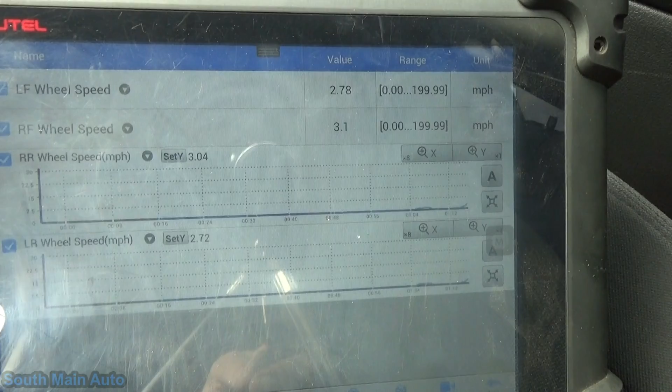We'll take it for a toot and see what it does. Alright, buckle your seatbelts, there we go. So left rear, that's going to be our bottom screen. I already see one little glitch there, just trying to pull out. Whoa, hang on, somebody's coming. We'll hang a Louie up here so we can go a little bit slower.

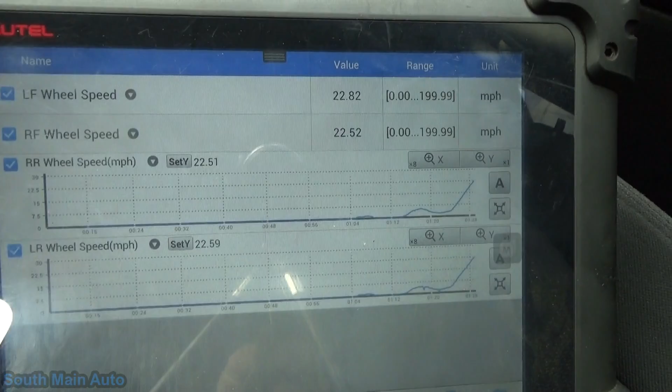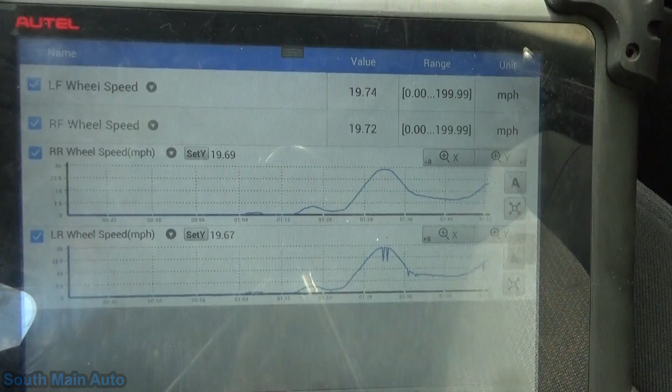Oh yeah, look at that. So even just looking at our scan data, hopefully you guys can see it, we've already got some glitches right there, and the other one I'm graphing is the right rear, so you can kind of compare it there. And I'm on a pretty smooth road.

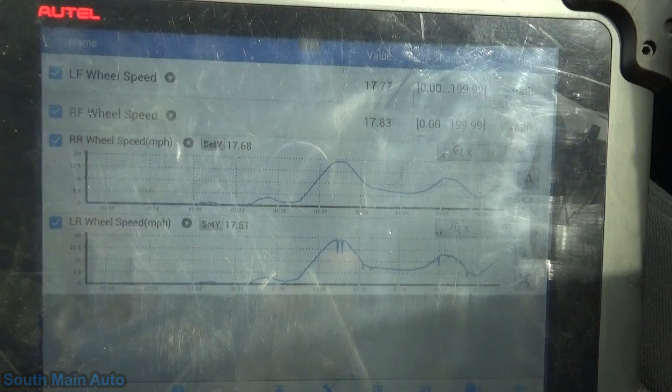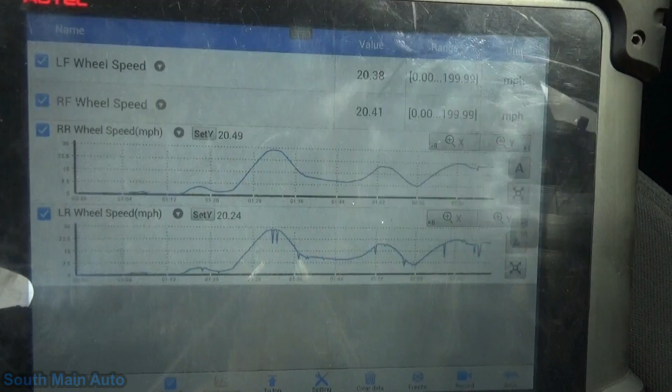So it doesn't seem to be indicative of bumps. We're gonna hit some railroad tracks up here, see if it goes AWOL on us. Hopefully you guys can see, I know we got some glare, but let's see what we got here. Some roughness, I can't see it quite... yeah, perhaps it has a little something to do with some roughness.

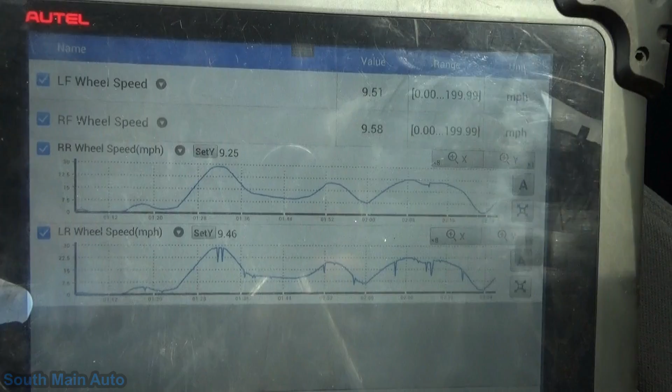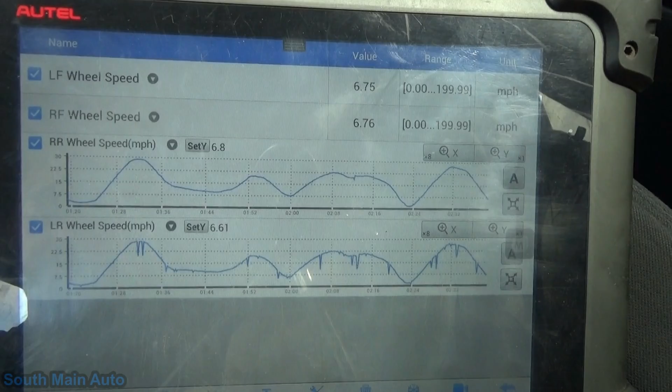I'll get up here to my rough road test drive area. We'll give it some wiggles and jiggles. But it seems even just accelerating there. So what we'll do, to get stopped, we'll just have a look-see at this one. There we go.

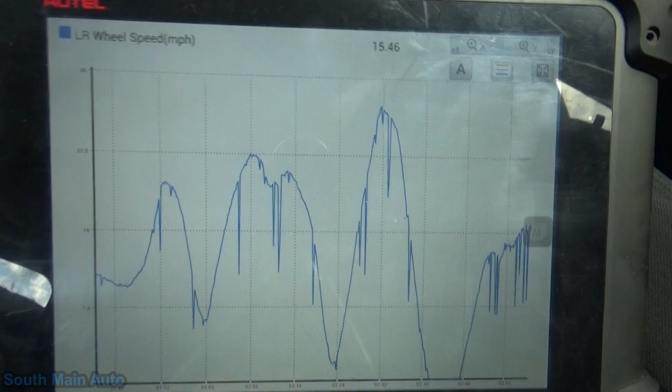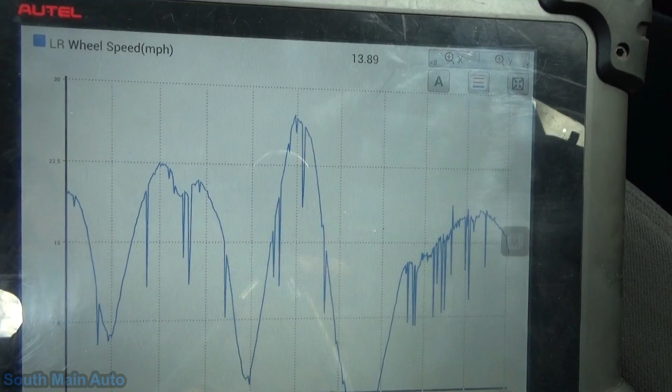Alright, let's go, hit a few little bumps here. That definitely makes a difference when you say, here comes some bumps. Bam! Get some real Jeep action.

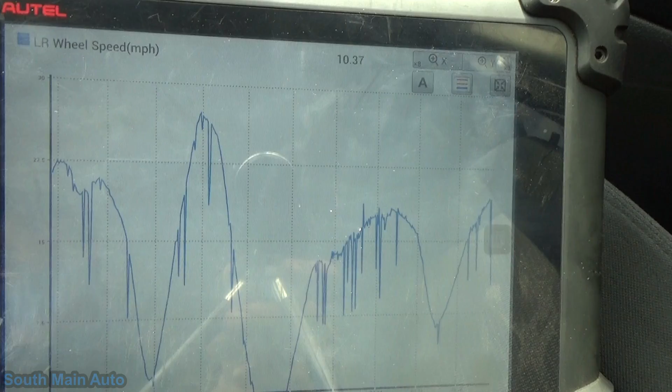Alright, so that does seem to make it worse, so that is a clue. Now we'll head out here on the pavement, relatively smooth road. Little bump right there. I would say the road surface definitely makes a difference, so that's something you can do on your test drive. It might give us an indication, you know, either a loose mounted sensor, connector wiggling, something like that.

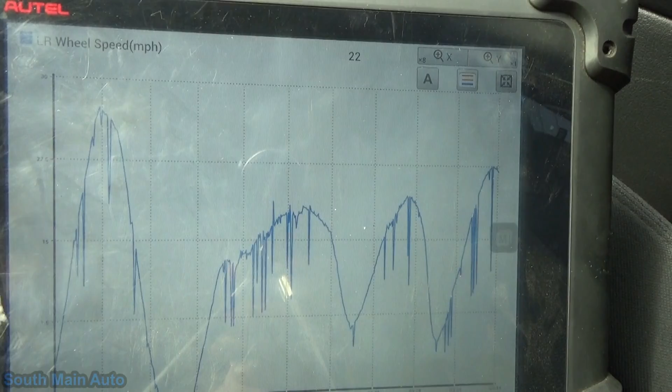Better stop at the stop sign. Alright, let's go back to the shop and have a little look-see.

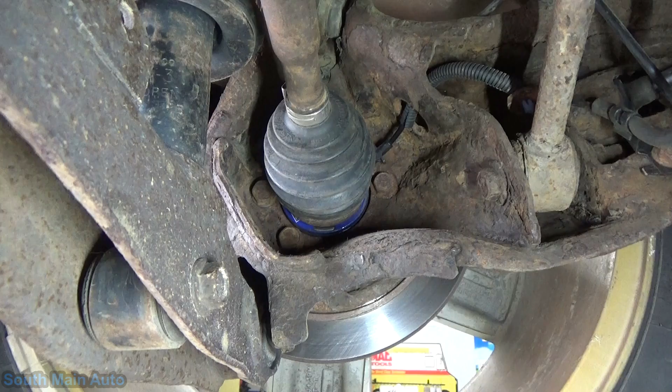So this is our suspect wheel, the left rear. And it's got new pads and rotors and caliper, wheel bearing, ABS sensor. And what I'm going to do, I see it's got an open spot in the bottom of that bearing where we can see the actual magnet strip.

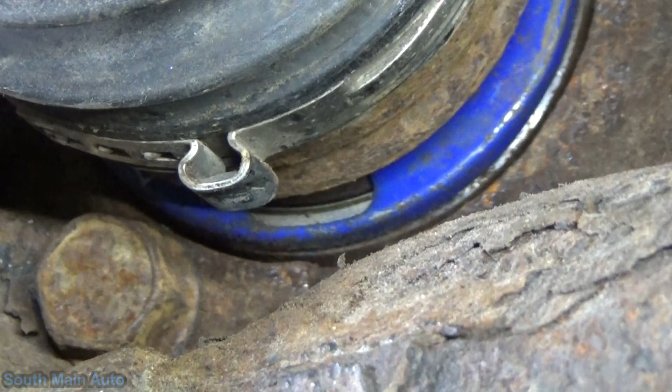So I'll zoom you guys in so you can see that, but we'll spin it a full 360 here. We'll use this part of the CV boot as a reference. We'll spin that around to make sure that we're not missing any part of that magnet, even though it is new. So we're looking at that little black strip inside that open hole there. We just want to make sure none of it is missing. Usually if they are, there'll be a big chunk out of it. So even though it's brand new, that'll usually cause that same pattern, that tone wheel performance code. And that's 360 and I don't see anything missing.

These sensors on these just clip into these bearings. Give me a long one, like the 45-degree angle pick that we have, Hannah. We'll just make sure that's not real loose. It's kind of hard to tell, these things barely clip in there as it is.

It seems kind of wiggly. That did come out extremely easy. I don't see any rub marks on it. Give me my small mirror, will you? You'll probably have to grab it off the other side.

So Hannah's going to get our mirror. I just want to look up inside this clip. I know they don't snap in super tight, but that seemed to come out pretty darn easy. I wonder if that got damaged. It looks like it is a little bit tweaked.

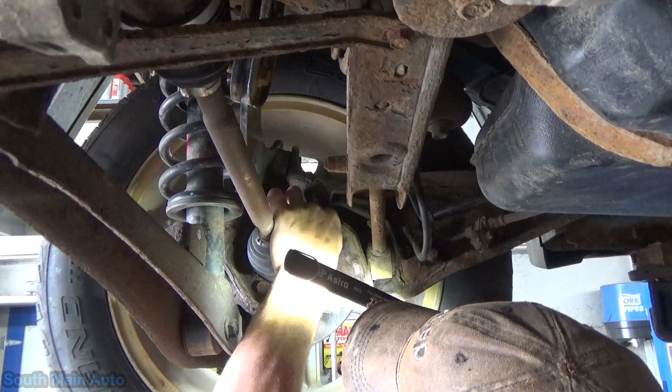Well, let's go find out. Alright, so I've got it pressed in there. It's definitely held in tighter. I don't see anything physically wrong with it.

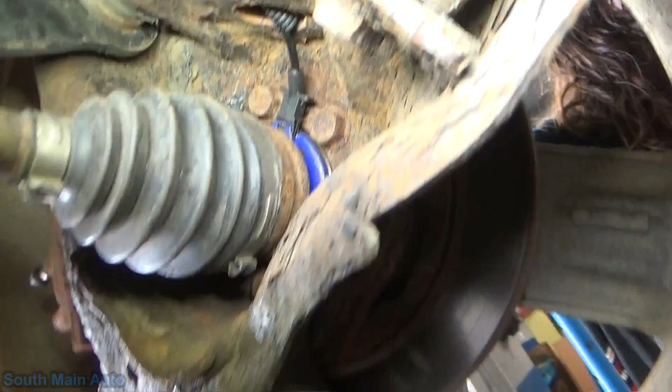What we're going to do, we've got Miss Hannah up on the step stool. She's going to try to spin it while we watch the scan data to see. I'm trying to spin it by hand. There's going to be a lot of irregularities, but we'll see if we have any of those big dropouts still.

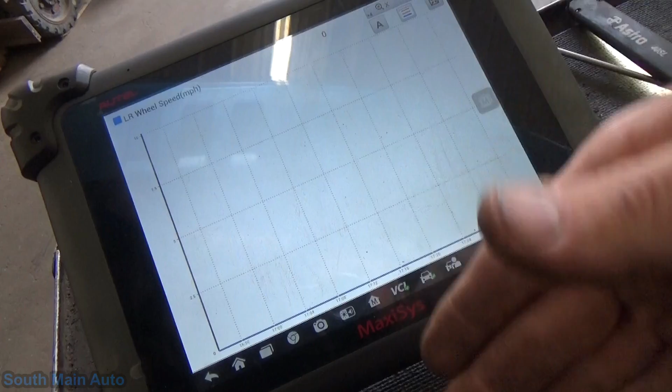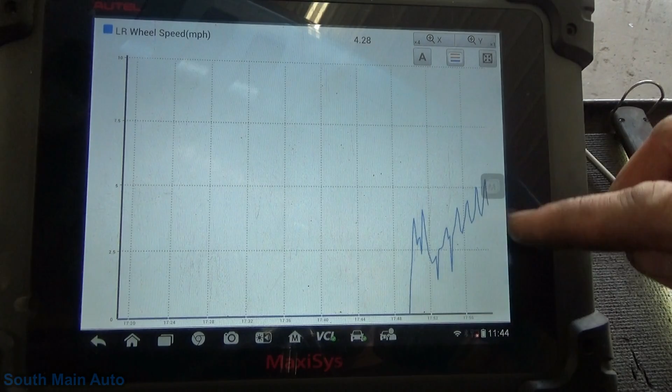Alright, go ahead and try it, Hannah. Try to be as steady as you can. So we're going to have these ups and downs as she spins it, but I'm looking for that right there. Definitely had one. That's just a result of her spinning it, but that is not right there. Alright, just a second, Hannah.

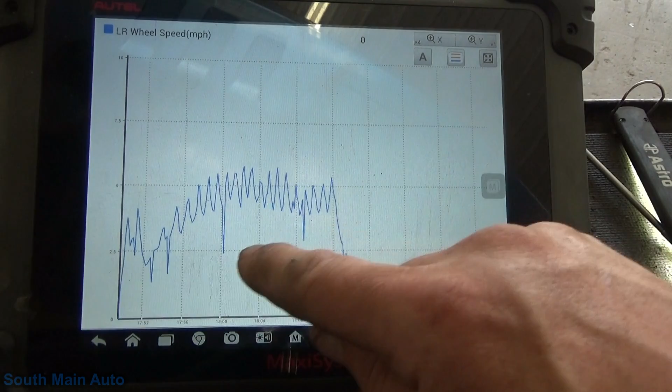So that's interesting. I think probably at this point we should throw a scope on it because, I don't know, can you pause this thing? I don't think so. But the distance from here to here to here, they look pretty much the same. That's why I wonder if there's a spot in that bearing that's a little funky or what the story is. Because that doesn't seem to be much different than when we drove it.

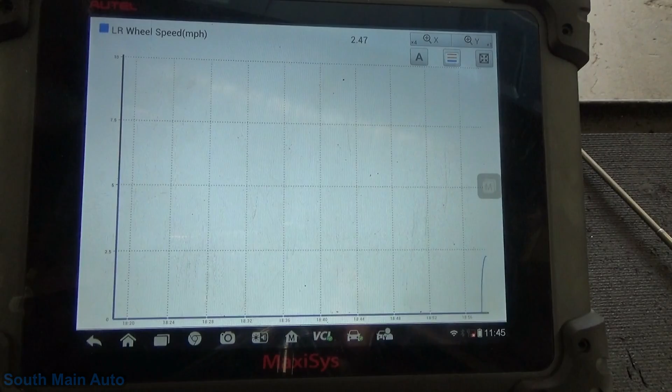All right, go ahead and spin it again, Hannah. I'm just tweaking on the sensor right now just to see. Oh, you slowing down on me, girl. My hand slipped. Yeah, there's a dropout right there, so that doesn't make a difference. Just keep spinning, I'm just going to kind of fiddle with the sensor. Tweaking it the other direction. Alright, that's good, Hannah.

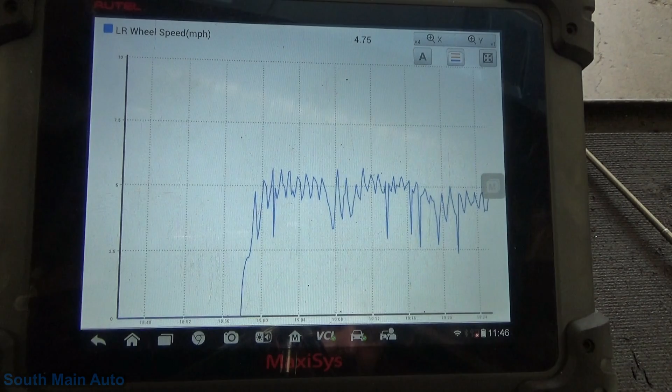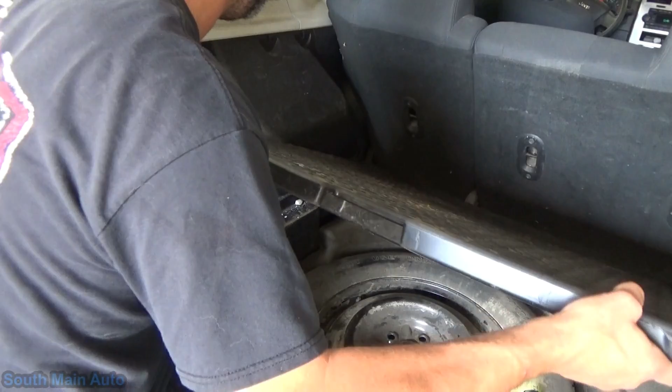So I think our next best option is to go to the connector, which hides up in here. Let's take this whole jabroni out of our way. Visual inspection on it.

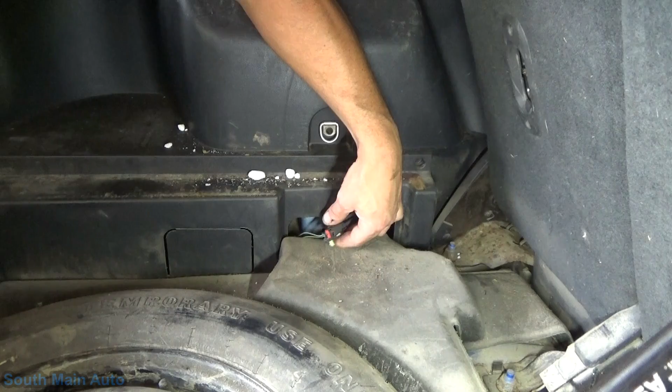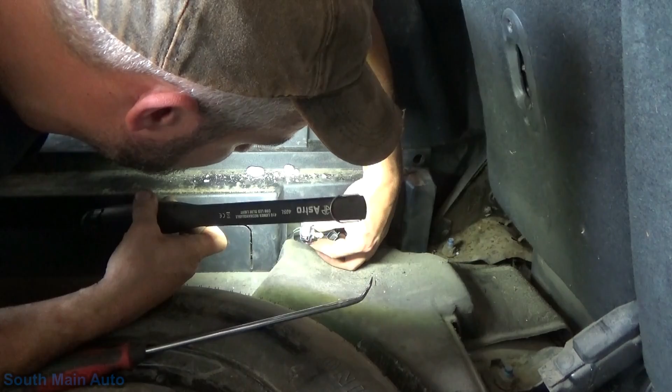Oh, she just dinged, so it must have had connection. I don't see anything visibly wrong. I don't know, those pins don't look right, the female halves of the pins. Might have some pin fitment problem here.

We'll go get our Vantage and our test kit, the AES Wave one. I'm going to do a drag test on these pins, the female half, this pin number 2.

Let's see, so which side is that? That is the negative side. It's kind of hard to say, but that one I don't see the metal tang. It looks like it might be pushed down. So before we get real far, we might do a little drag test on these. Might have a pin fitment problem.

One does feel a little bit loose. I can feel some drag on it. Not as much as the other side, but it's really not until it's quite a ways down in there.

So I'm going to take and just pop one of these pins out for right now. I just want to have a little closer look, just to see.

Tighten it up just a little bit. Come right inside. Bend that tang up.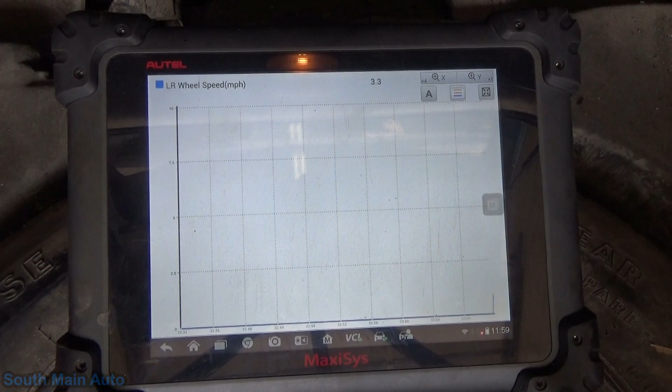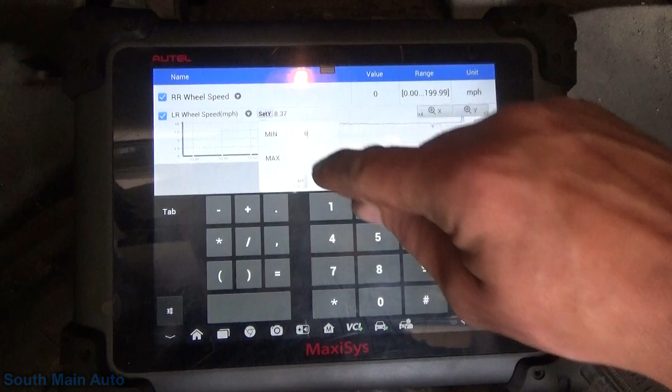Alright, so that left rear is spinning. We're going to have to change our scale. Alright, here we go, try this again. I just got to change my... go 0. Whoa, 20, there we go. That gives us a little better indication.

Alright, so now we've got some issues going the other way. Let me just look at this tire. So the tire is spinning pretty consistently. Let me just fiddle with this connector up here. Alright, so I'm fiddling with the connector. You know what, just for grins and giggles, because I've seen scan data wrong, I'm going to take and unplug this. Okay, make sure we're on the right side, or the left side rather. Plug that back in.

Just want to mess with this connector. Tug on the harness here a little bit, tugging on it where it comes up through the car.

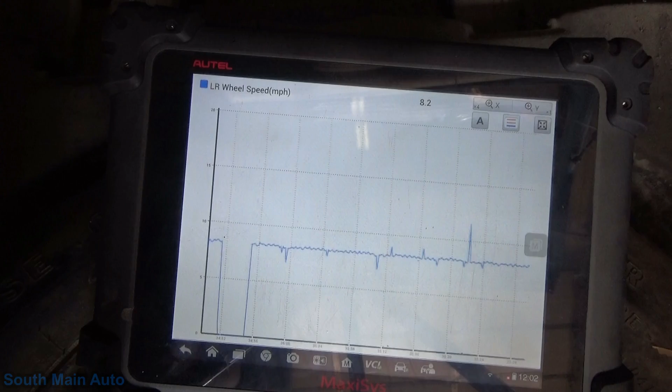Got one glitch there, I'm wiggling and I don't see much happening. Alright, now I'm not going to wiggle, I'm just going to let it do its thing here. And there we go, we got some glitches there. Very interesting. So I'm not touching anything and it's doing that on its own.

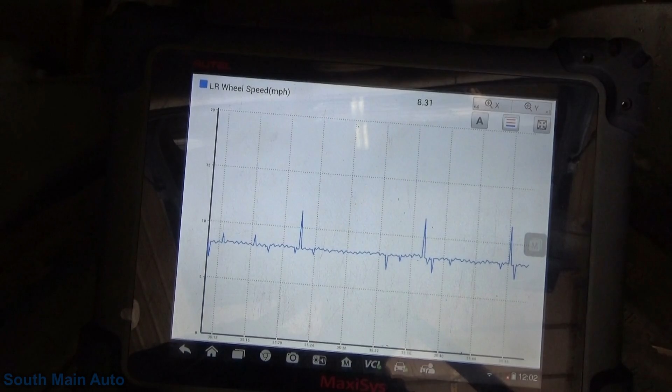Alright, time to scope it. I think our best tool here is to use the Pico, the Vantage just isn't going to cut it. So what I did, I just tapped into the vehicle harness side.

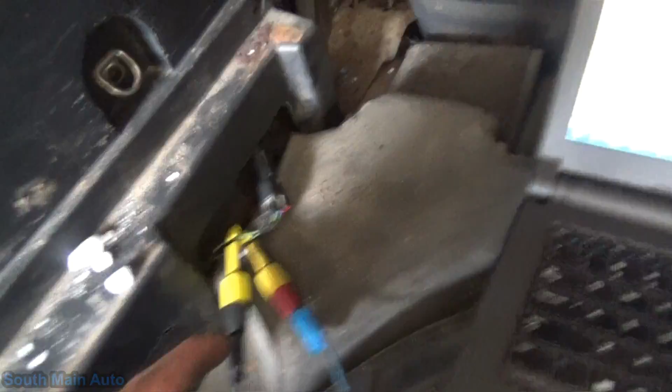You can see this is running approximately 11 volts. If I remember right, these active speed sensors will run like 10.5 to an 11 volt square wave. And usually what they'll do, or what you'll see a lot of times is, they've got a power source and a ground back here, they'll send a signal back on the power source, or that's the monitored circuit I guess I should say. I'm going to go ahead and start it up, drop it in gear.

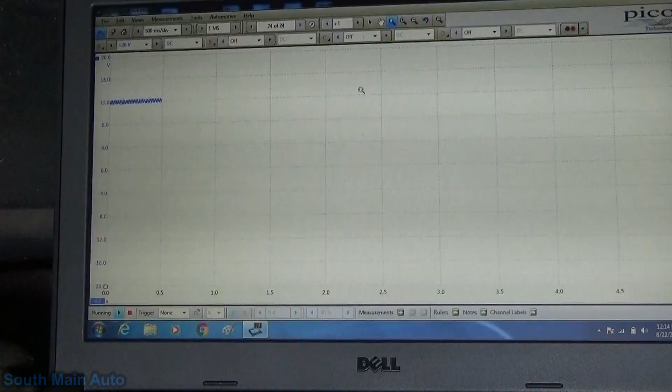See what we have. Alright, let's see here, so I've got it in drive. There's our voltage scale's gone up as charging voltage has. It's kind of odd that it dropped out there, so I'm going to kind of compare, I do have scan data going here also.

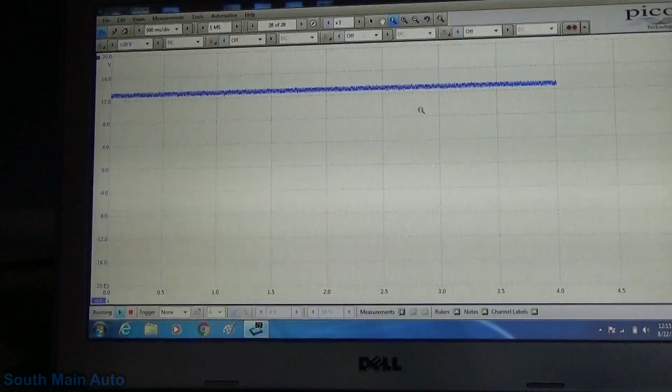We'll just kind of see, I'm starting to get some glitches there in the scan data. I'll just wait till we get to a real glitchy spot, then we'll pause it and we'll zoom in on it. Alright, so there was some glitches in the scan data here, so we'll zoom in on this waveform just to see if there's any anomalies.

I see one right there. So we can see the on time or off time, however you want to look at it, with that signal. Well, that one is completely different time basis wise. Let's just kind of have a peek at some more of these.

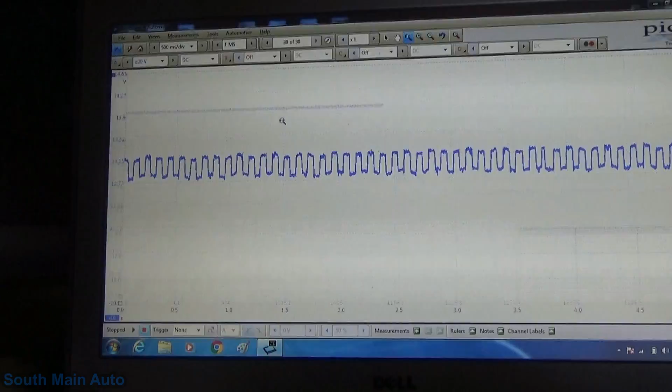Just checking, I want to see if they're consistent. So we'll check the falling edge of that one, falling edge of that one. Let's see, 564, .560 milliseconds, so that's looking like it's pretty consistent. Yep, there's another one on the screen, 561 milliseconds.

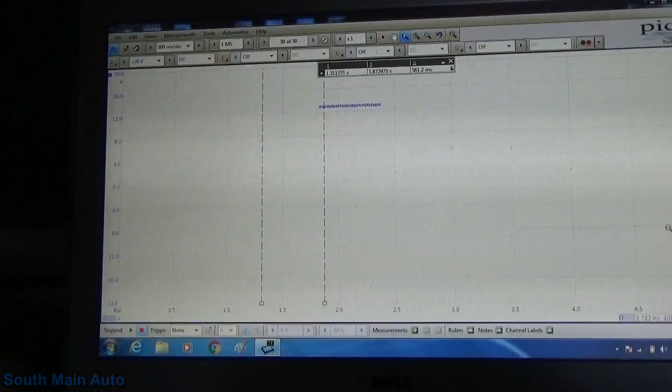And then we stopped recording. Let's take and fill up our screen here, see if we see that again.

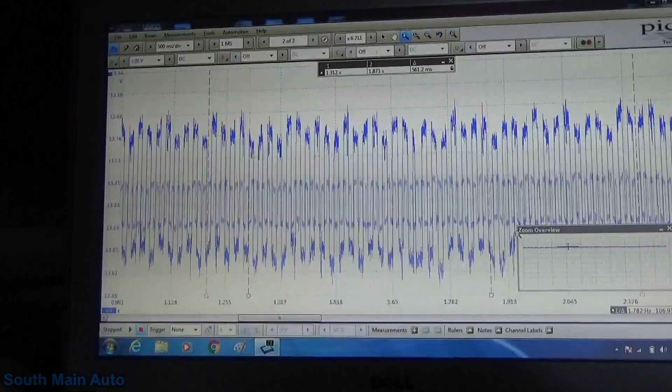Whoa, fella. I totally botched that, didn't I? Trust me, I'll fix this, folks. First day on the job, don't mind me. What in the thunder am I doing?

There's one, and there's one. Yeah, 560 milliseconds, so it seems to me that there must be a problem, so I'll zoom in on this. So we do have this one segment here that is thinner than the rest as far as its transition time from high to low, so the average good one is almost 9 milliseconds, and then this one skinny one is about half that, at least. Yeah, about 3.5 milliseconds.

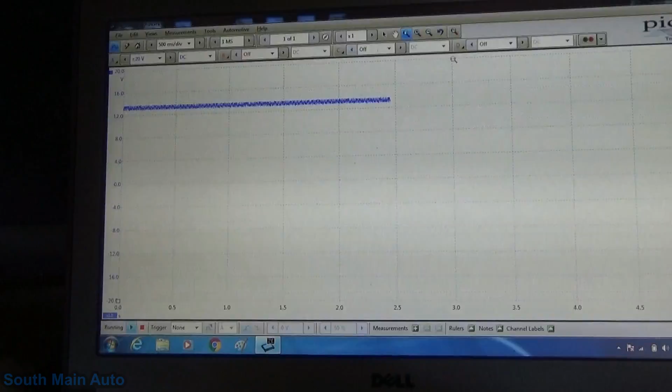I don't believe that these have any kind of time interval on them, if you know what I mean. You know, they don't have like a reference mark. Not that I've ever seen.

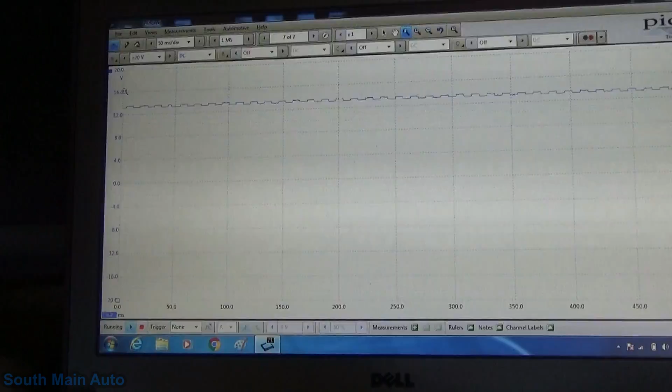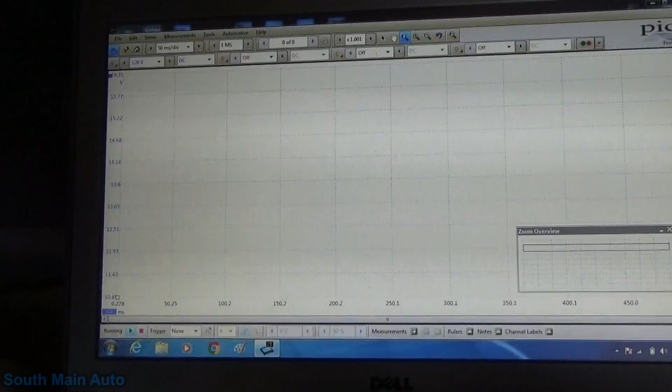I guess what we can do is just compare it to the other side. There it is again. Right there. So that's pretty interesting, you know, this is just kind of hit and miss glitchy. Of course, this is processed data, so it's not going to pick it up as quick. But I'm assuming that is what our ABS unit does not like. That would be my guess.

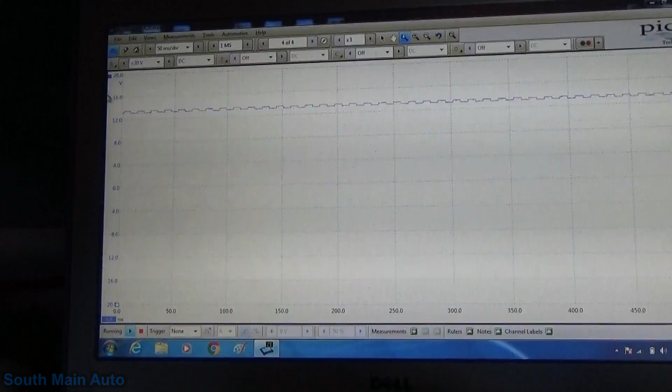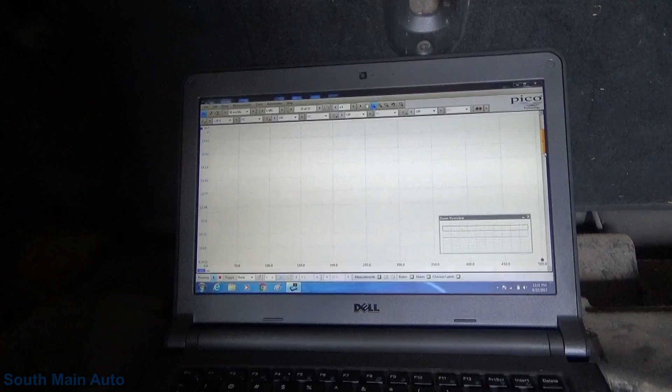So let's look at the other side while we're right here. I'm going to undo our probes, come right over to the other side. So it's going to be our right side wheel speed sensor. Just going to tap into this, get our other wire moved over here.

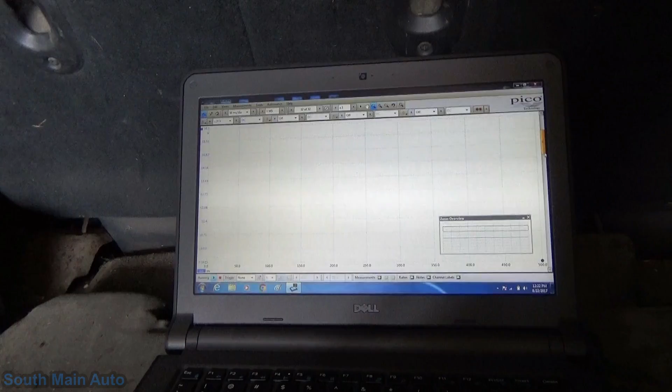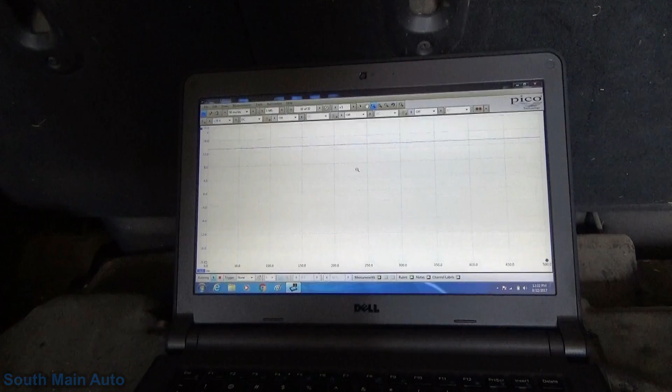Alright, how come we're not seeing it? Is that wheel turning? No, it's not turning, that's why we don't see a signal, folks. Let me figure out how I'm going to get that wheel turning. Let me try to stop this wheel over here. Come hold this tire, Hannah.

Got it? Alright, Hannah's holding that wheel so the right wheel will spin. Let's just zoom in on this whole pattern here. So this is the right side, the side that has no problems. Every one of these marks is looking pretty consistent.

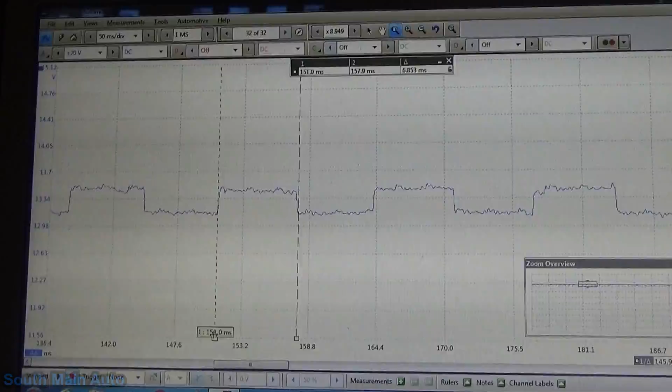Just take a freeze of that. Let's see what the time base is, what would we say, about 9 milliseconds roughly. These ones are about 6.5. Yeah, almost 7. I think our other ones were 8 something.

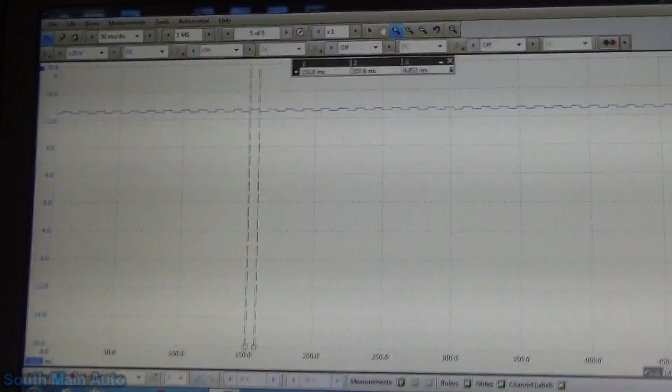Oops, clicked the wrong button. Man, you guys are gonna fire me. Everybody's sleeping at this point anyways.

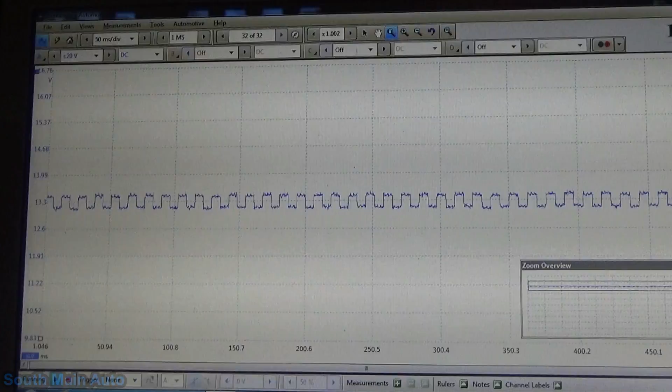So they look pretty consistent. I'm gonna make the call: brand new wheel bearing, junk. You can throw it in park, it's fine. So based on what we've done, you shut the key off. I have to believe it is something wrong with that wheel bearing, which houses the magnetic pickup ring for the sensor. The only reason I say that is because the anomaly in the waveform is very consistent, however many milliseconds apart. So if we spun it by hand, we could probably mark it on the wheel and find that poor, corrupt signal every revolution, would be my assumption.

So yeah, I'm gonna make the call, need the wheel bearing. Alright, so what we'll do, proof of concept, let's get the scope running. I got 2 seconds per division, so it's gonna be a long time base.

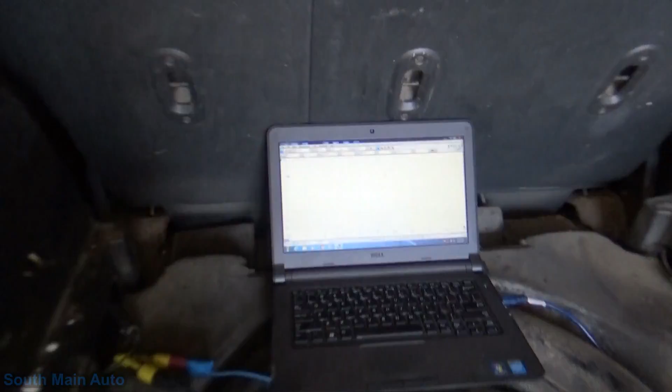Let's just spin the wheel, let's say 3 revolutions, judging by the valve stem. There's 1, 2, 3. Now, theoretically, if I'm right, we should find 3 anomalies in this waveform.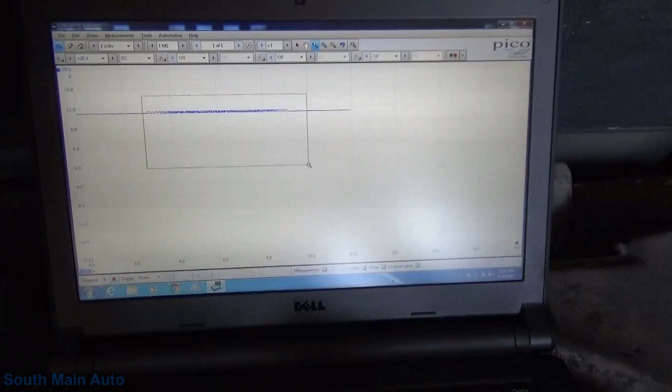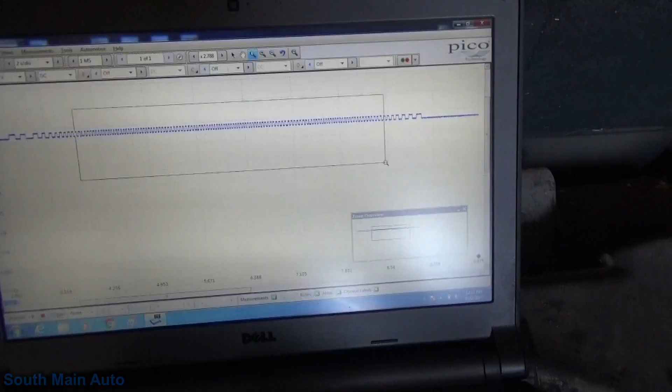Which you've got, 1 right there. We'll zoom in on this a little more. Let's see, let me just use my bare eyes here. Yep, so we've got 1 anomaly right there. 2, 3. So that makes sense.

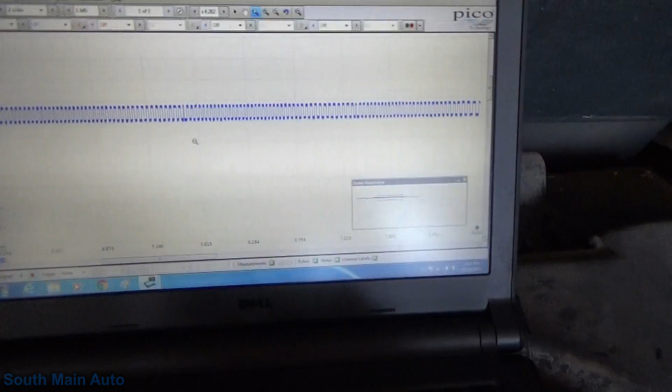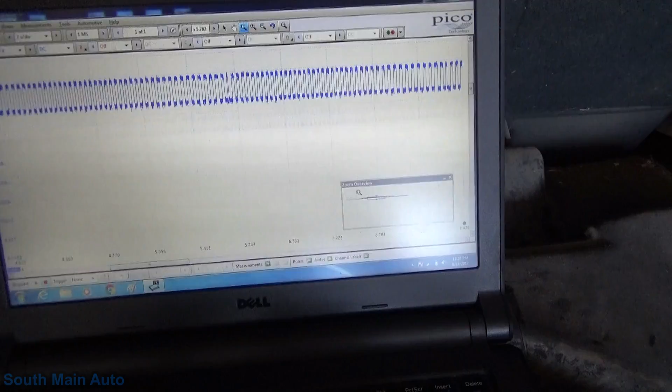It'll be the exact distance between each of them. 1, 2, and 3. Let's, probably seem a little better now. So we got one right on the edge of the screen, 2, and then 3. So that makes sense, wheel bearing's junk.

All right guys, well I guess we got to leave it at that. You're going to have to take my word on it. The bearing's bad, and I think we definitely proved that looking at the consistency in it.

I can't get a hold of the customer to find out what he wants to do. I know he just put that on, so obviously wherever he bought it from, I did check with Advance to see, and they said he didn't get it there. There's another part store that's local, but they don't save their slips by customer name, so if he wants to warranty it, he has to physically take it back there. So I'm not going to get in the middle of that. I'll wait to hear from him and see what he wants to do.

I do have another video - I lied to you guys, I told you it was a Patriot, but that's a Compass, same thing. I do have another video where I changed the rear hub on one of these. I'll link that video in the description in case you want to see that process, because the day's winding down. It's already 1 o'clock, just ate lunch.

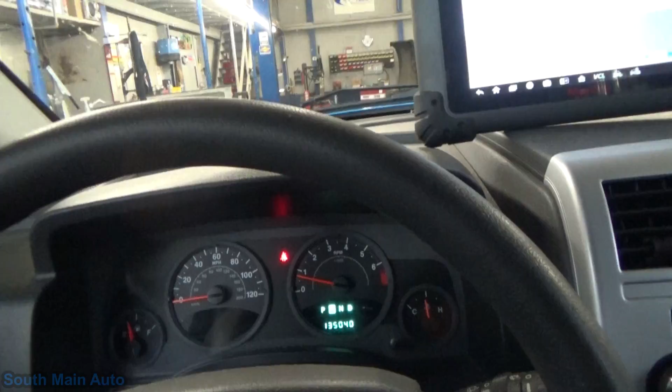Alright guys, so the guy did show up right towards the end of the day with the new bearing. So I've got both our rear wheel speed signals up there on the screen. We're going to take it for a little toot.

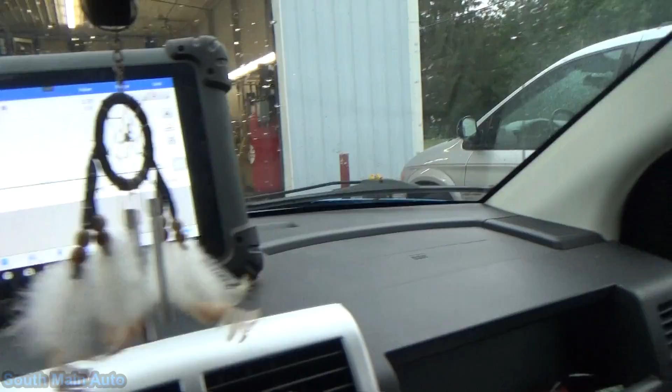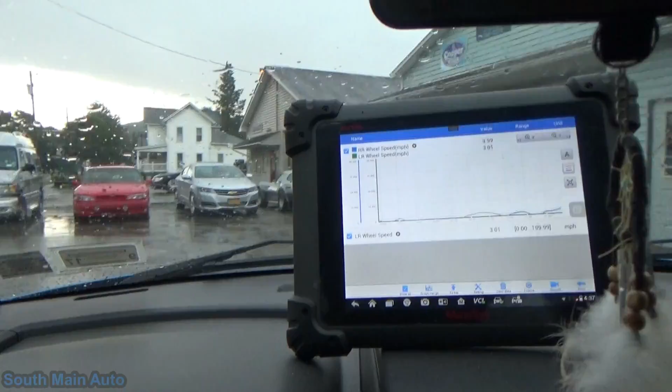We got like Stormageddon blowing in on us. You're just going to have to look through all my hopes and dreams. Let's see if we can do this. There we go. Turn on some wipers here. Oh man, if this ain't - then they thought texting and driving was bad. Oh yeah, somebody's coming, let's go. We're on.

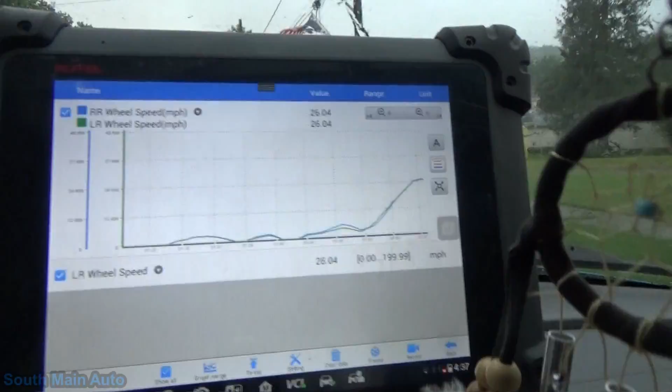Alright, whoa, hit the radio. Oh man, somebody's gonna complain about the seatbelt dinger. You know what I say about that? Life doesn't give you seatbelts.

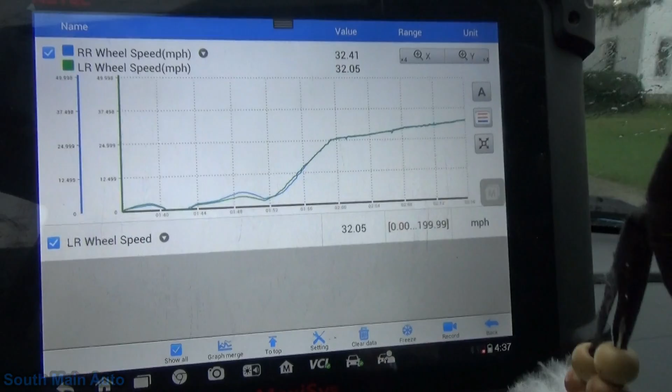So there we go, I'd say it's pretty definitive. Oh man, looks good to me guys. No lights on the dash, so that's good, other than the seatbelt light, which I'm just gonna let it ding for the whole rest of the video.